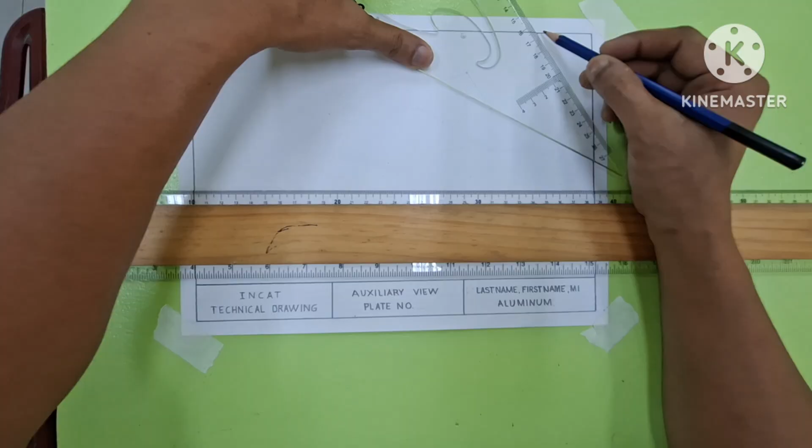So, it should be lower, so that we do not touch the borderline. Then another is the corner of this. Draw another isometric line. Then copy the length, which is 6. Then another 6. Then another 6 here. Then connect the points. Connect points. Okay. And the fourth step is to visualize and darken the necessary lines.

So in darkening, choose a line that you want to darken first. So for me, I'm going to darken all the isometric lines, starting from the top until the side, until the bottom part of the object. Same thing goes to the other side. Darken the necessary views and darken the non-isometric lines

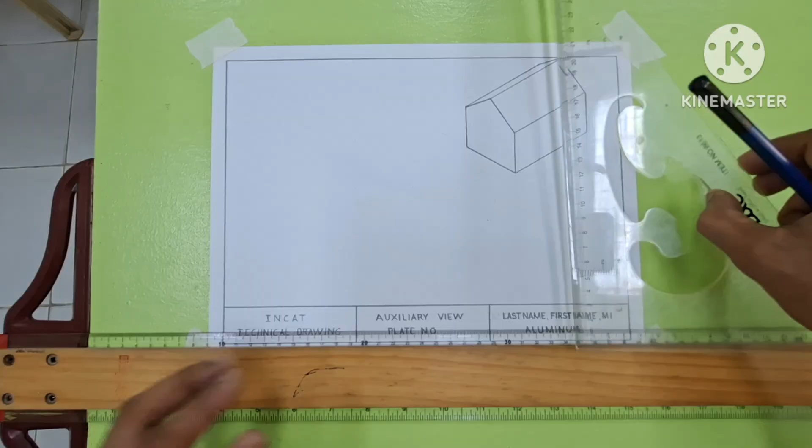Then we are going to add some details here, like a window. So let's measure the distance. So this is 2, and this is also 2. And let's give guidelines here. And from the top, from the bottom, let's measure 1 meter, then another 1.5 meters, for us to have a little window here. So we're going to darken the window, because this will be used in explaining the auxiliary view. Okay.

So this is now the window of the house block. Okay, so let's use the eraser to erase those unwanted lines. So this is now our isometric view of our object.

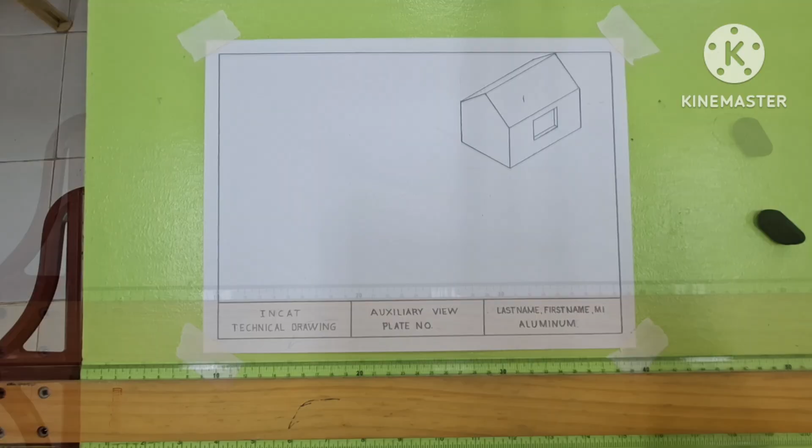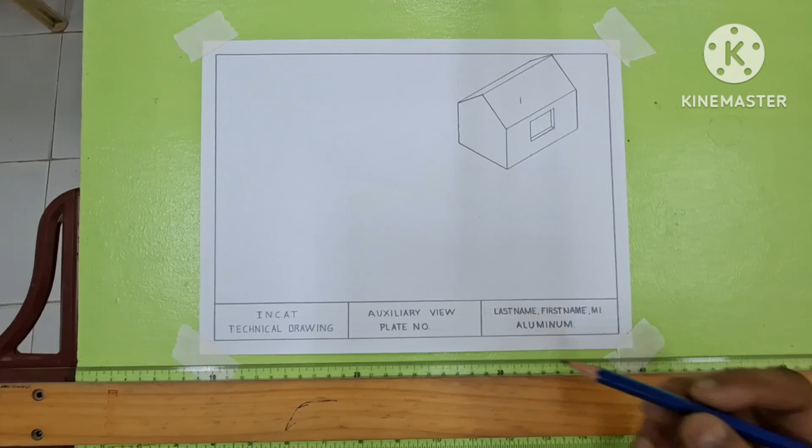Okay, welcome back again. So now that we are done with our title block, letterings, and isometric view of the object, we are going to draw the orthographic views of the object. So the first thing that we are going to do is to use a 3H or 2H pencil and draw the axis of projection, the horizontal axis, and the vertical axis. So this is now the center of our axis.

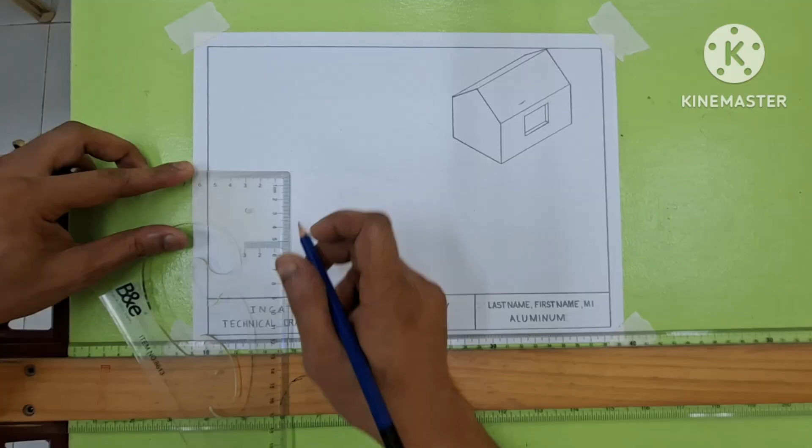Now, lay out the distances from the center. So, for me, I measure 1.5 centimeters from the center to the right side. Then another 1.5 from the center to the left side. Another 1.5 from the center going up or to the upper side. Then another 1.5 from the center downward. And from those points, I draw construction lines. Why? What is the reason we are going to put a distance here? The reason why is to put our dimensions there.

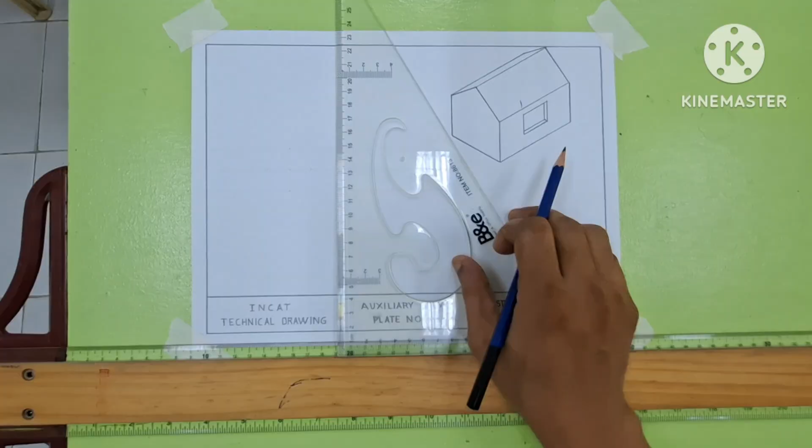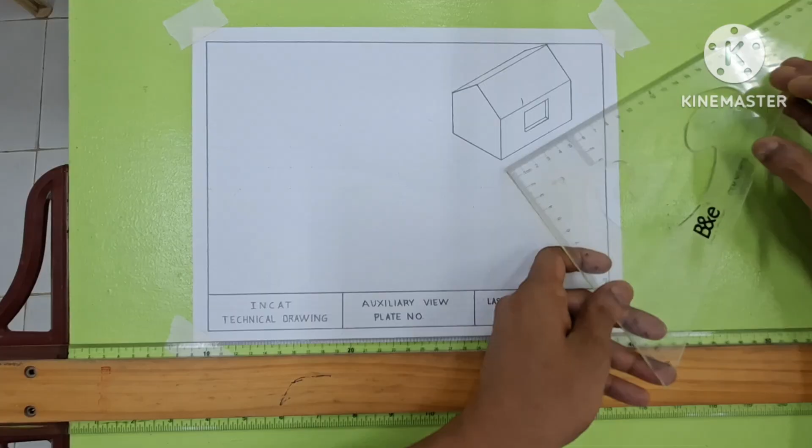Then after that, after the axis of projection, the vertical axis and horizontal axis, lay out the measurements of the object. So the width of the object is 4. Then we are going to transfer it here, 4. Then the half of 4 is 2 because of the upper top or topmost part of the house block. So the measurement is 2. Then the length of the object or the house is 6. Then we are going to transfer it here, the right part of the front view.

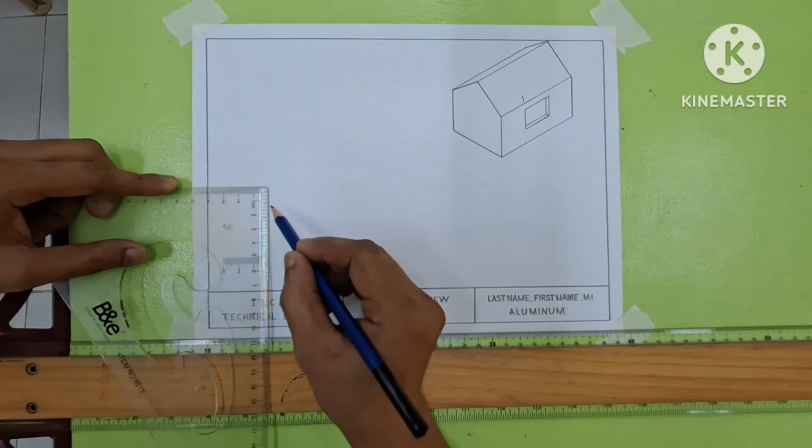Then the height of the object. The height of the object is 3 plus 1.5, so a total of 4.5. So from 0, 3, then 4.5. So from 0 to 3. And from those points, I'll draw construction lines. I'm going to extend all the lines using a 3H pencil. Then, I use my triangle as well as my T-square to draw vertical lines. I'll extend it until the top part. Then another line here. Then another here.

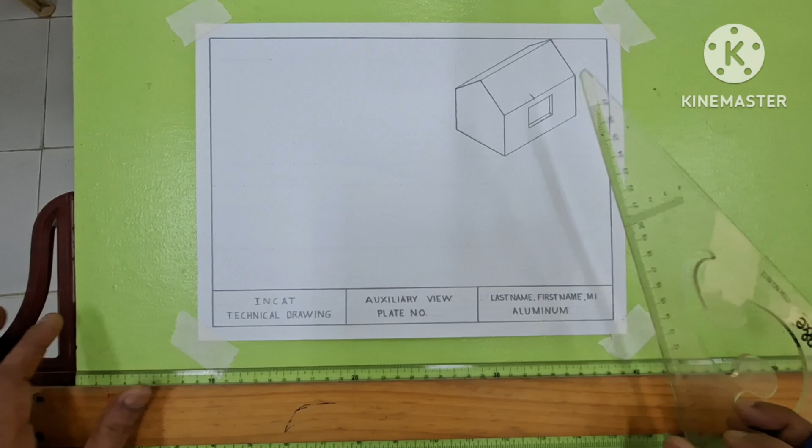Now, in transferring the length of the object there are so many ways. So for me, in order for us to finish this one, the length is 6. So the length in the top view is the same, 6 also. Then draw a guideline here. When you were in your lower grades, you have discussed or known about the miter method, the compass method. So in here, I shortcut the process. So now, we're going to visualize the shapes for the front view, top view, as well as the side view.

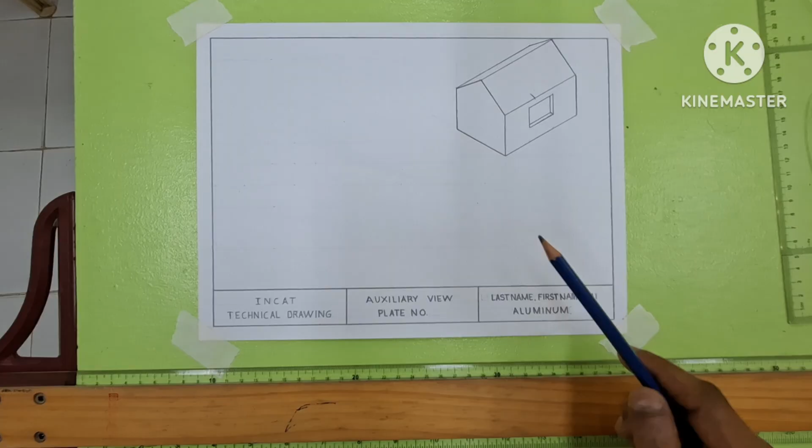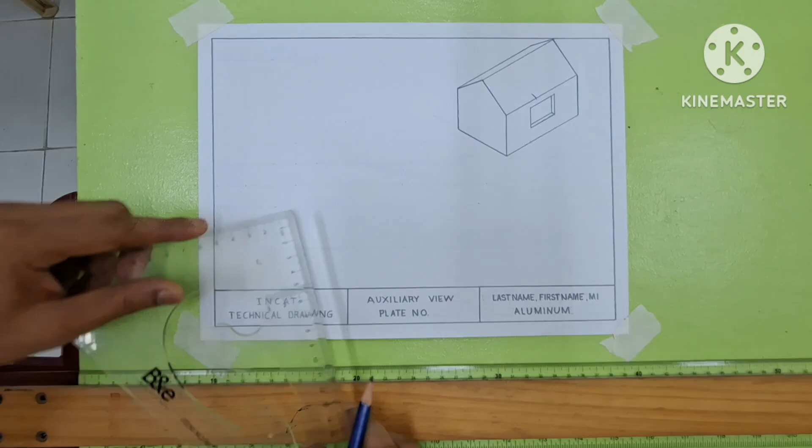So in the side view, there are some details that we forgot, like the window. So 2, and this is also 2. Then the height is 1, then 1.5. So the height is 1 and 1.5. So your guidelines are light lines only. So this is now the window of the side view.

Then we are going to darken the necessary lines. So first I'm going to darken the lines on the top. Next is this one. Then, using my T-square as well as triangle to draw vertical lines. Now, the pencil that I am using is a 3B or a 2B pencil. So, this is now the top view. This slanting part is here and here, while the other slanting part is this one and this one.

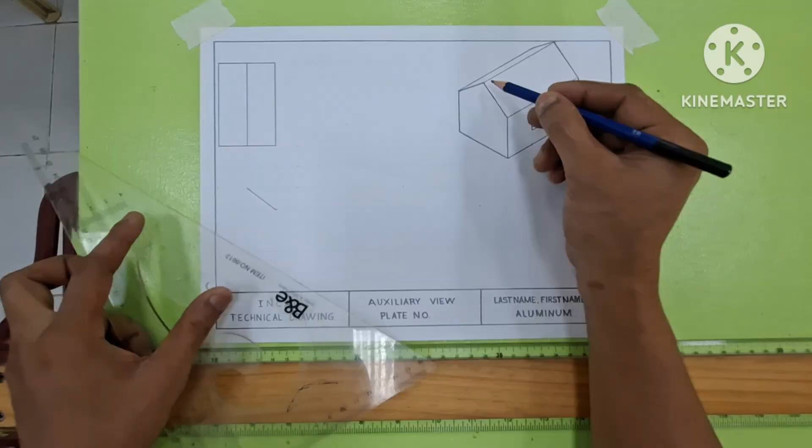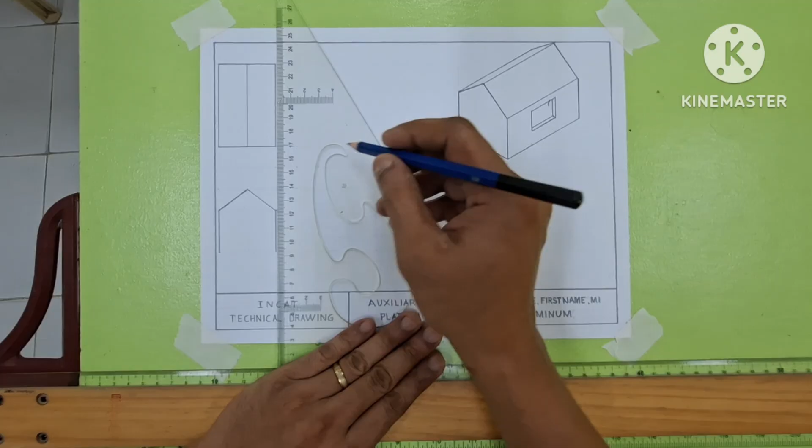The next is the front view. So, just connect the 2 points here. This will be the line, and the other line is right here. Then next, this line. So since it is vertical, I'll use the combination of tools of T-square and triangle. Then another here. So this line represents this edge, while the other line represents this edge of the object. Then the lower part. So this is now the front view of the house block. Now, next, the side view.

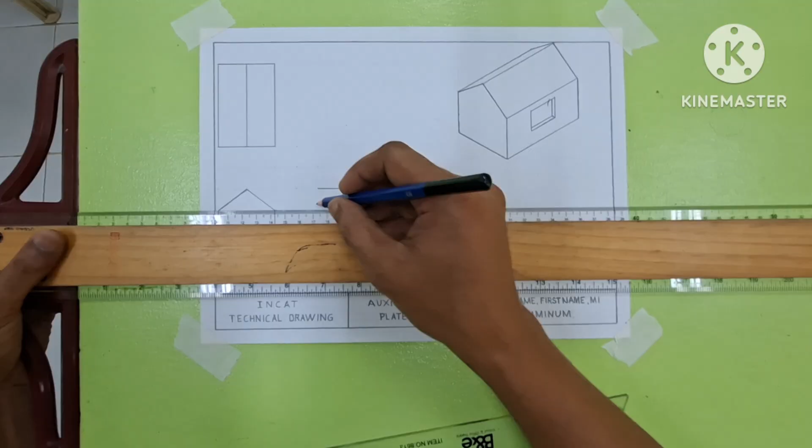So this part represents this edge, the upper. Then the next edge of the house block represents this line. Then the lower is at the bottom part of the side view. Then using a triangle again, a combination of triangle and T-square for our vertical lines.

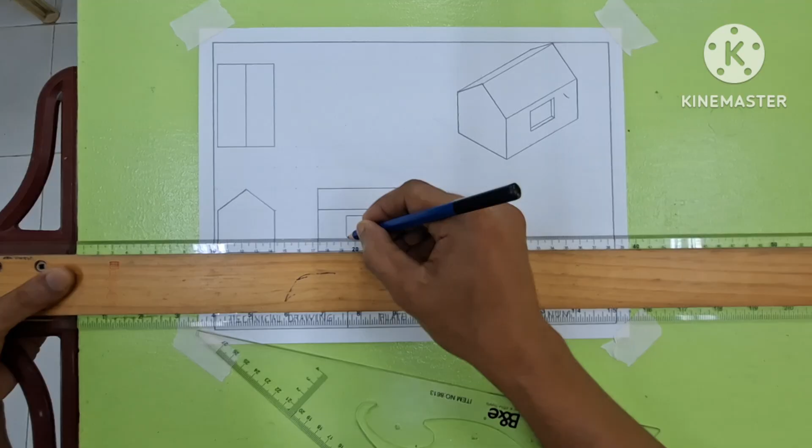Then for our window, we'll draw another 2 vertical, then 2 horizontal lines using our T-square. Okay. So now we have our orthographic view of the object.

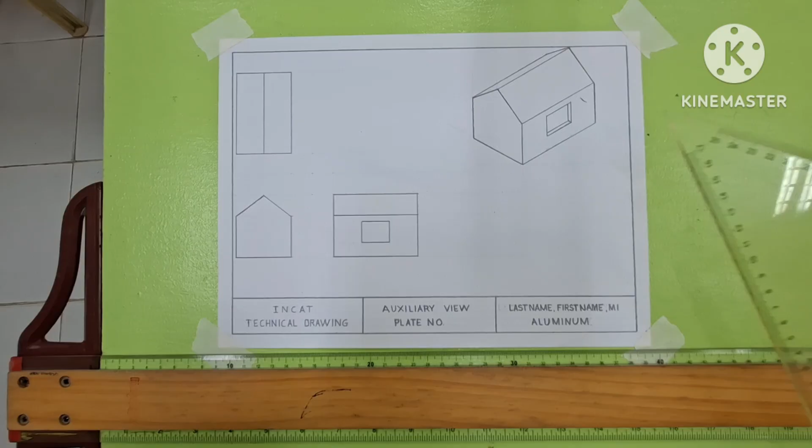Hello again, welcome back. So for now, what I'm going to show you is how to draw an auxiliary view of this object. The auxiliary view is used only when there are surfaces that are inclined or oblique. The materials that we are going to use are our protractor to measure or to draw angles, 3H pencil as well as our 3B, and eraser if needed.

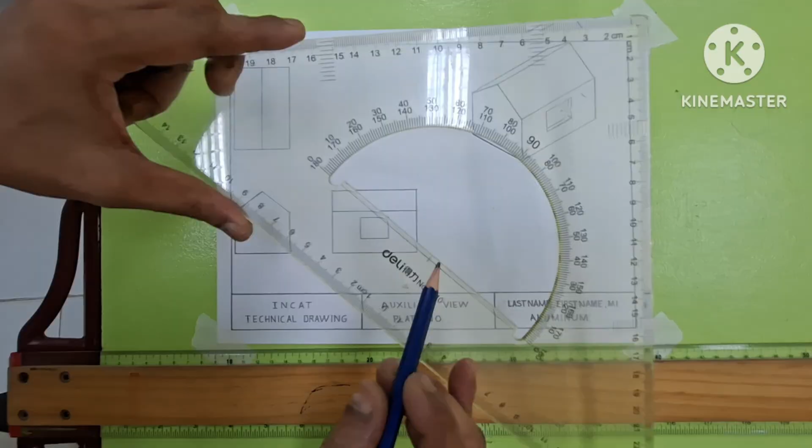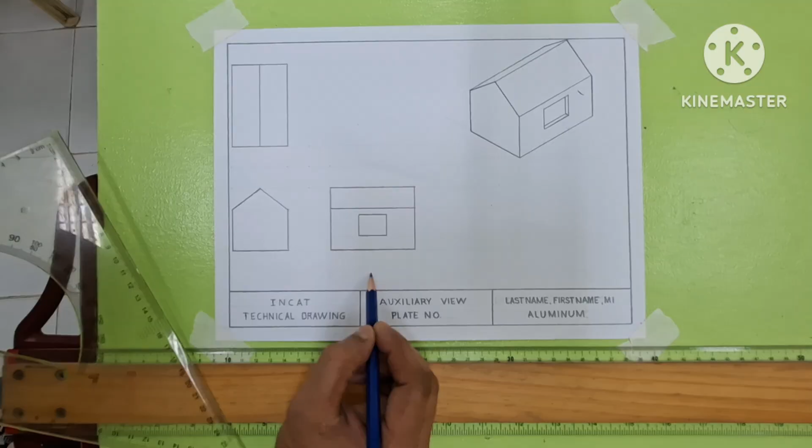So the first thing that you will do is to use your protractor. I hope that you know already how to use the protractor. Anyway, I'm going to show you how. So this is the center of the protractor. Place it on this corner. Then this is the zero part and this is the other zero part. So we are going to extend some guidelines here using our 3H. Extend a line here and another line here, because this will be our 0 as well as here 0.

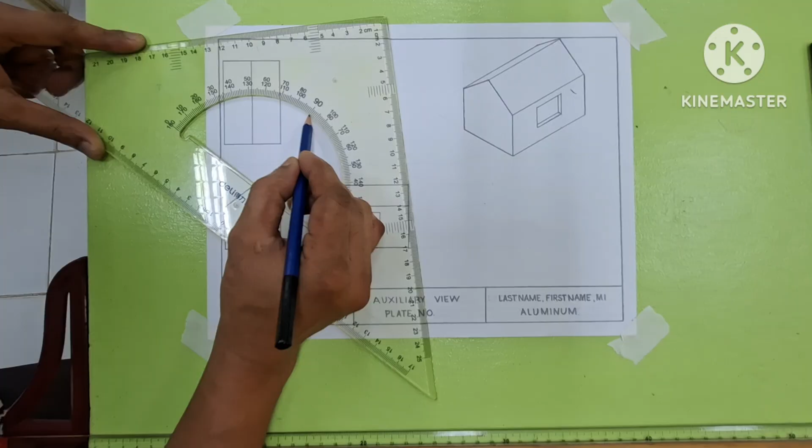So the center of our protractor is placed at the other corner of the slanting line, just like this. Then the lines that we drew a while ago must be aligned also with the 0. So if you can see, this line here and this line are aligned. Okay. Then now locate the 90 degrees here, and from that point to this corner, draw guidelines. Just like that. Light lines.

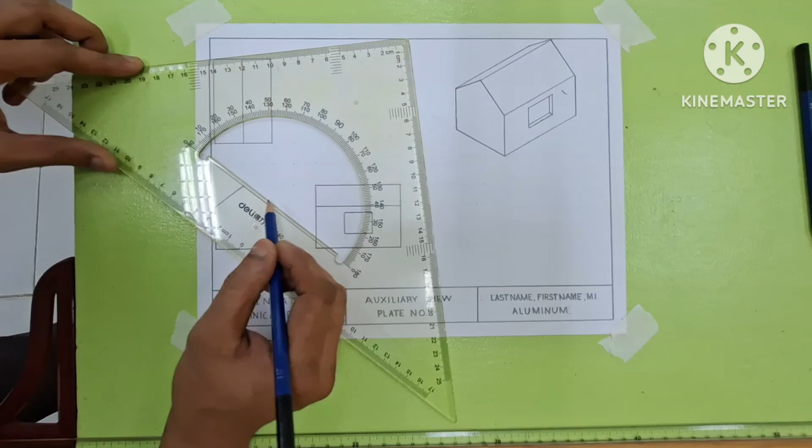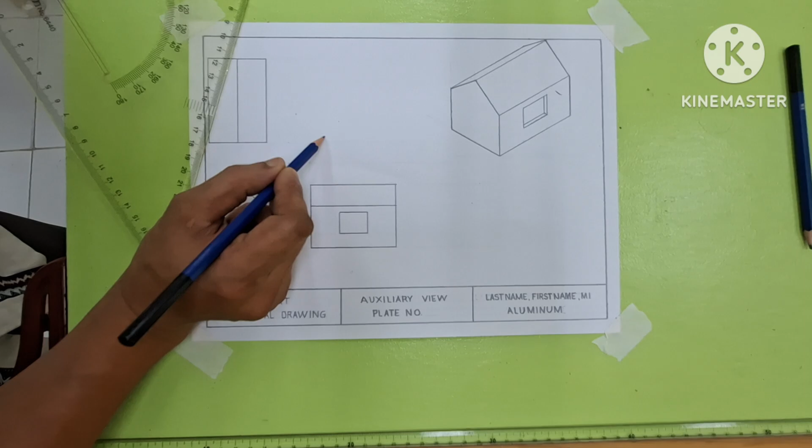Then the same process goes here. The center of your protractor points out there and the other 0 line is aligned with these guidelines. So 0, then aligned with the guidelines. Then point out the 90 degrees. Then again, draw guidelines. Okay, so this is the point. There are so many points.

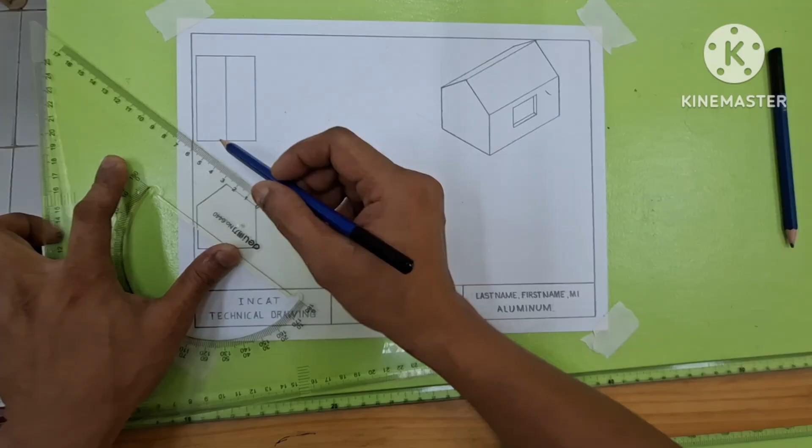Next is to draw what we call the folding line. A folding line is parallel with this slanting line. In order to have a parallel line, we're going to measure the distance between them. So the distance is 1 cm and another 1 cm here, because parallel lines are lines that have equal distance with each other. Then make guidelines here. Okay. So this line represents the edge of our rooftop.

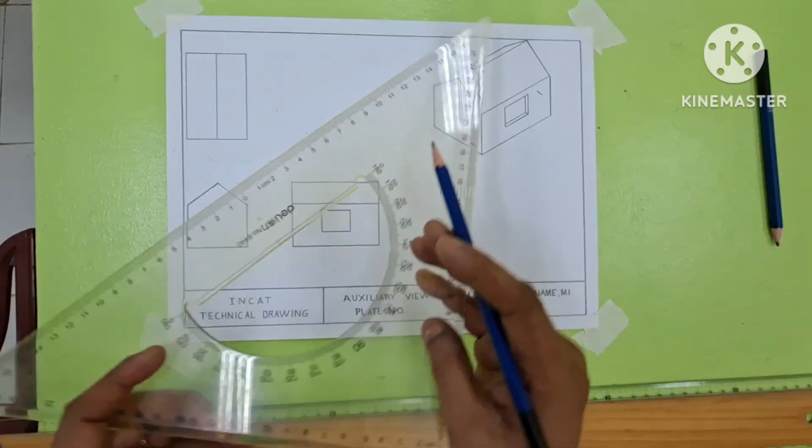Then, in order for us to know the length of the rooftop, we are going to measure its length from the side view or the top view, because the top view and side view have the same length of the object. Since the length of the object is 6 in the top view, in the side view it is also 6, so we are going to transfer the 6, or the length of the object. Now we are going to draw guidelines here.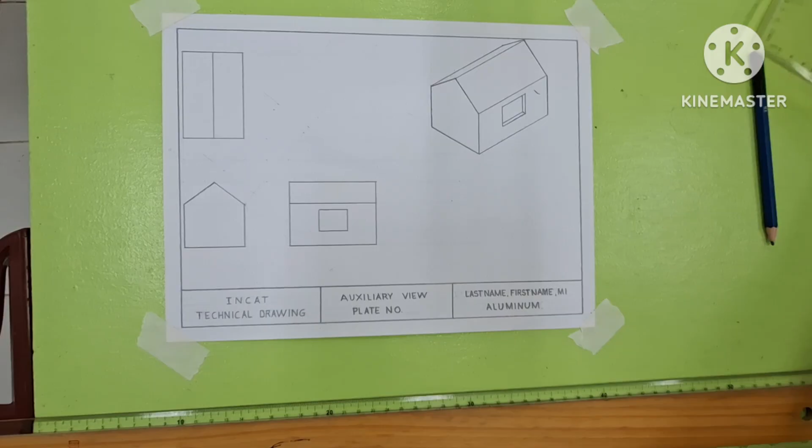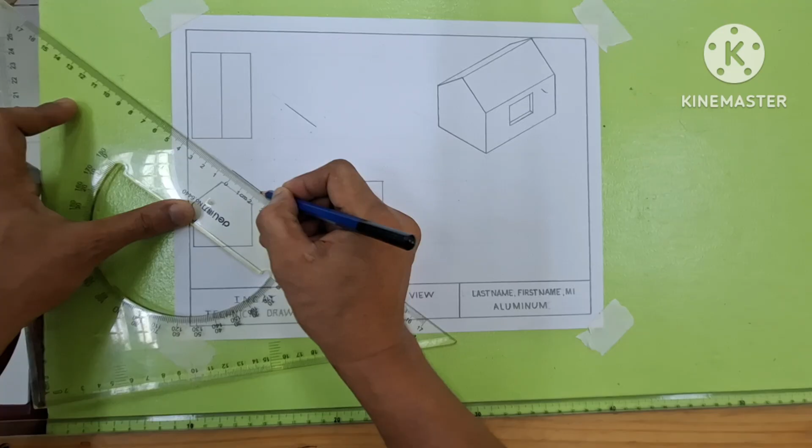Now it's time for us to visualize and darken the needed lines. So first is to darken the top part of the object. Okay, so this is now our auxiliary view.

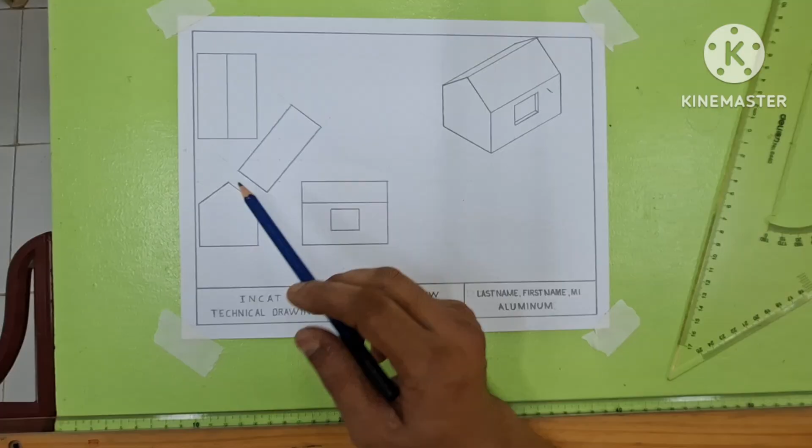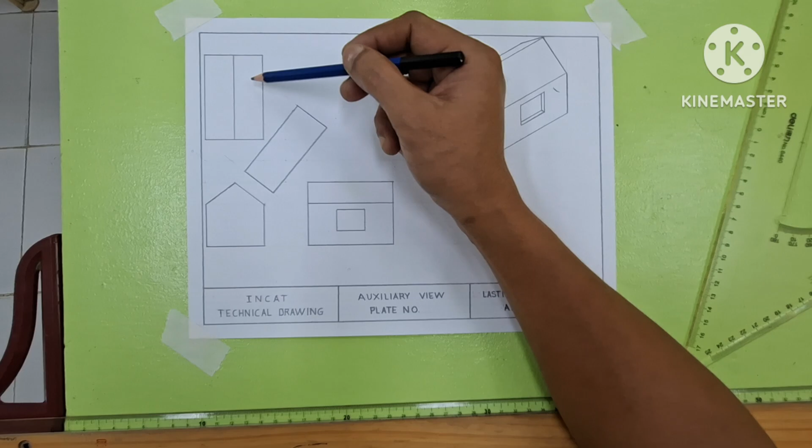The use of this auxiliary view is to show the true size and shape of a slanting surface that is foreshortened in the top view and in the side view. Because this is not the true size and shape of the slanting surface seen in the side view, and this is not the true size and shape of the slanting surface seen in the top view. In order for us to know the true size and shape, we make an auxiliary view.

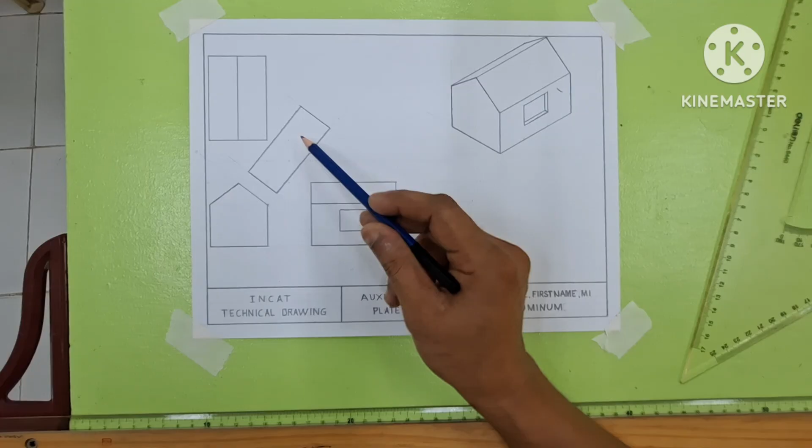So an example of this is you are going to find how many roofing sheets you are going to buy in order to cover this rooftop. So I hope you understand the use of the auxiliary view.

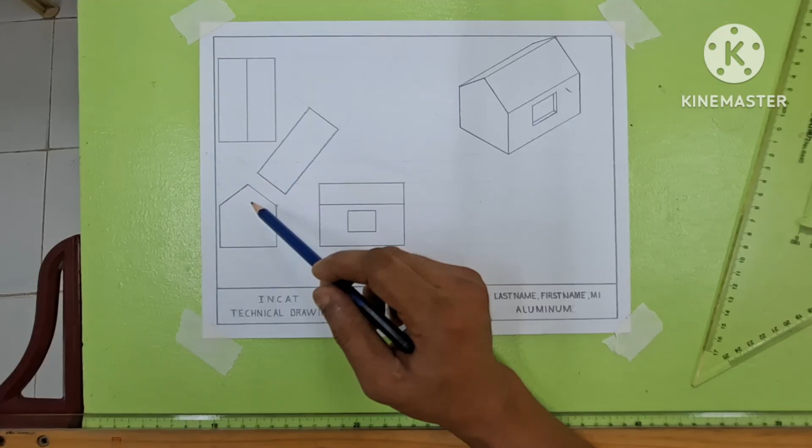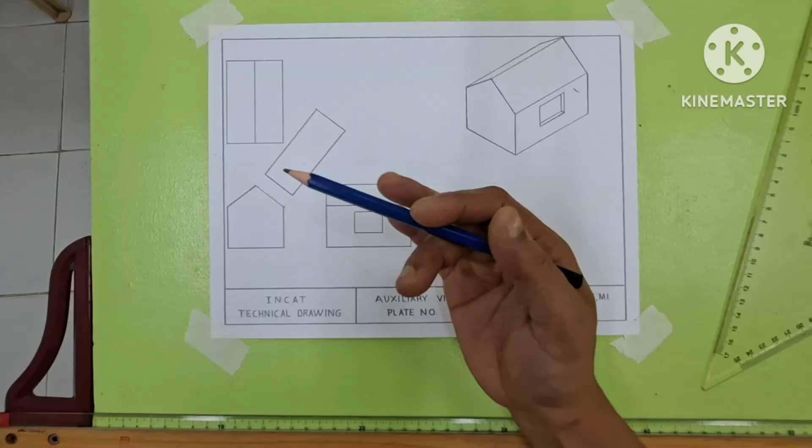Aside from that, this is also called a partial auxiliary view. A partial auxiliary view is when you only draw the slanting surface of the object without the other non-slanting parts. The non-slanting part of the object is this area. As you can see, we did not put it in here because this is not a slanting surface. Only the slanting surface is drawn for a partial auxiliary view. But for full and half, let's learn this in another video. So I hope that you understand the use of an auxiliary view or a partial auxiliary view.